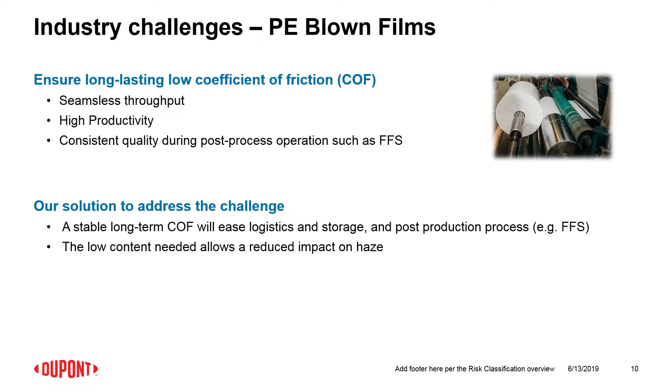Our solution makes a stable long-term COF, and that will make easier the logistics and storage of the film during the processing chain and all post-processing operations. This additive is added at a very low amount into the skin layer, and does not impact, or very slightly impacts, the haze for a clear film. This additive, AMB12235, as I said just before, is added only in the skin layer at a very low dosage. It doesn't migrate through the film. It doesn't transfer from the siliconized layer to the opposite layer, for example, when the film is rolled after the extrusion process. And this additive can be used with very standard dosing equipment.

This additive is a combination of slip agent and anti-block, and we know that the right combination of these two components is very efficient to manage low and consistent COF. It's easy to supply and handle. This master batch is a free-flowing pellet. It is used with conventional dosing equipment, and something very important, it doesn't change the extrusion process parameters of the film when it is extruded. The typical recommended level is between 4 and 6%.

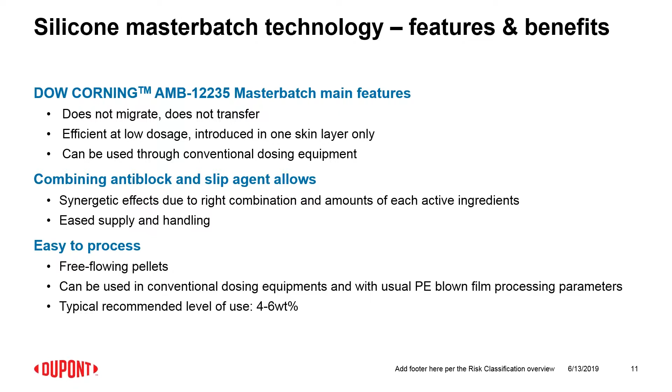So, experiment setup: I will present the film structure where our additive was studied compared to traditional organic solution. We will focus on COF, mechanical property, and transfer. So we have defined a multi-layer PE film structure in order to evaluate the efficiency of our additive. This PE blown film was produced on an industrial line.

It was a 3-layer film: one skin layer, 15 microns thickness, made with a plastomer, very low density polyethylene, where polymer processing aid and anti-block were added with slip agent, organic slip additive. A core layer that could be a multiple core layer, but in our case this core layer was made only with LDPE, and the opposite layer, thickness in between 15 to 20 microns, which is a combination of LLDPE and LDPE plus polymer processing aid plus silica as anti-block.

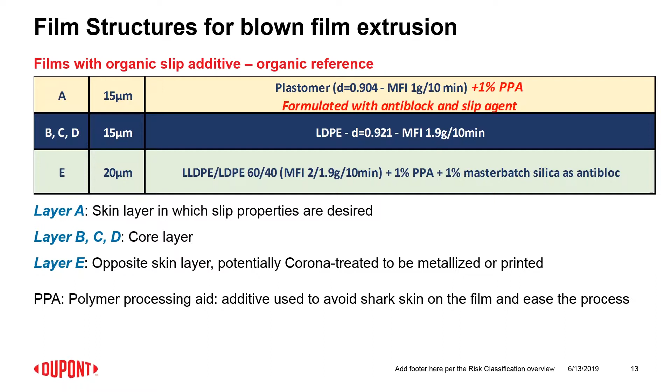This layer E could be corona treated to make the film metallizable or printable. Same structure of the film where our silicone additive was tested. So our additive was added into the layer A. So it is the low sealing initiation temperature skin layer made in plastomer. Plastomer is a very low density polyethylene, density 0.902.

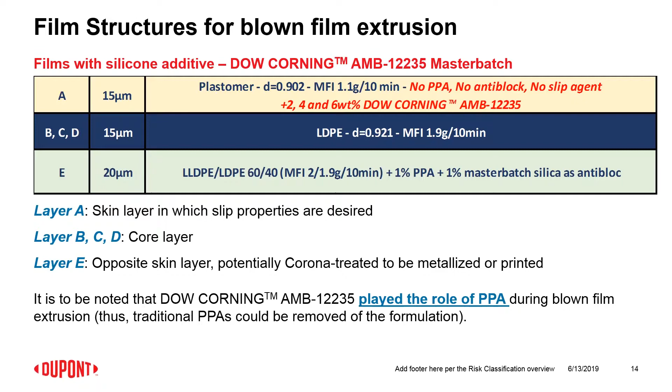Our additive was added in between 2 and 6% into this layer. No processing aid was added and no anti-block, because our additive is a combination of slip agent and anti-block. The core layer was exactly the same, LDPE, and the opposite layer, same composition, same thickness. Because our additive is based on silicone, our additive works as a processing aid, and polymer processing aid could be removed from the formulation of the low SIT skin layer in plastomer.

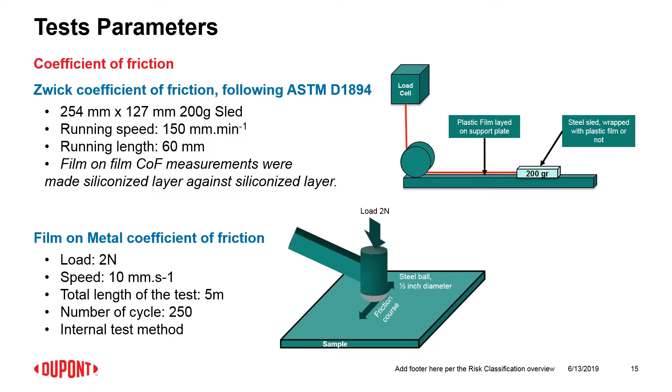This slide presents how we determine coefficient of friction on the low SIT skin layer made in plastomer where slip agent was added, comparison between organic solution and our silicone additive. So film measurement with a Zwick machine following this norm, and the film-metal coefficient of friction. We worked with a lab device which is called the Tribotester. It is an internal method. We apply a load on a ball, and we apply a certain number of cycles and determine dynamic and static coefficient of friction steel-film.

Of course, we have evaluated the effect of the addition of our additive into the skin layer on mechanical property of the film. So we have determined tensile properties, cross direction and flow direction, and tear resistance following these two mentioned norms.

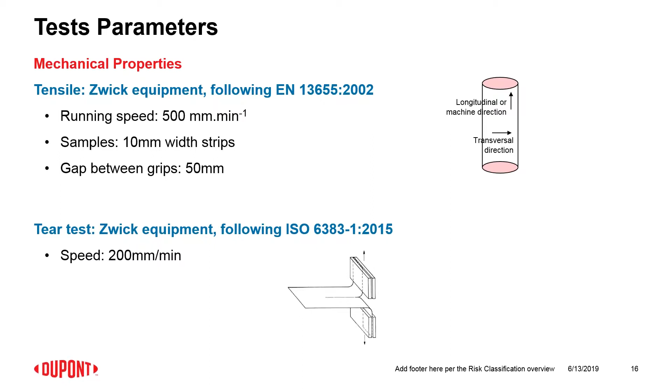So results, that's the most important part of the discussion. This curve presents dynamic and static coefficient of friction film-film. So our additive is added during extrusion process into the low SIT skin layer of the film, and we follow coefficient of friction as a function of the concentration of the additive. Purple curve dynamic COF, green curve static COF. Of course, higher is the amount of our additive, lower is the coefficient of friction.

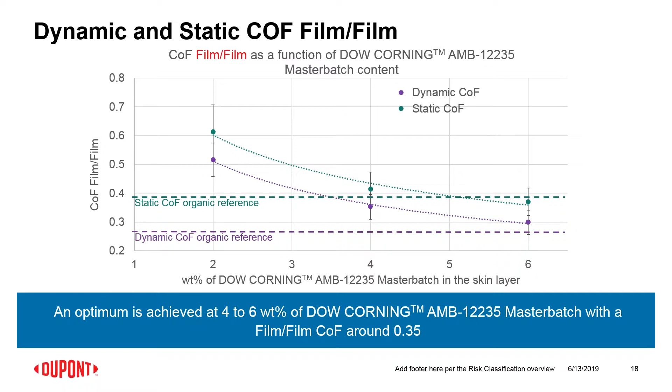We compare the efficiency of our additive to static and dynamic COF coming from organic reference, and we clearly see that we can reach exactly the same behavior in terms of coefficient of friction film-film when the amount of our additive is in between 4 to 6% into the low SIT skin layer. And we can say we reach film-film COF around 0.3, 0.35 when 4 to 6% of our additive is added into the low SIT skin layer.

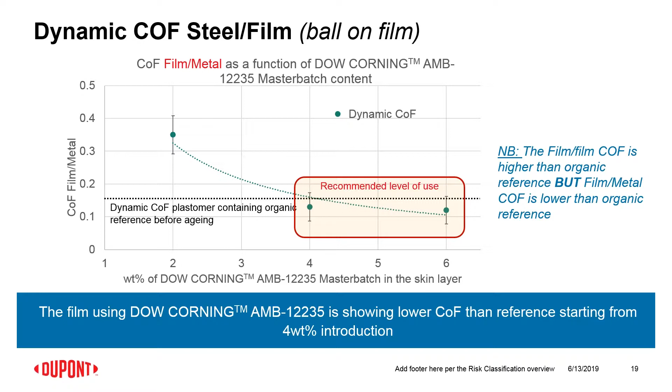But what is very interesting is to observe the evolution of the efficiency in terms of COF of our additive after aging. So we apply an aging on the film, 2 months at 45 degrees, and we observe that dynamic coefficient of friction is really consistent, no change. So there is no effect of aging on the efficiency of our additive in terms of coefficient of friction, steel-film COF.

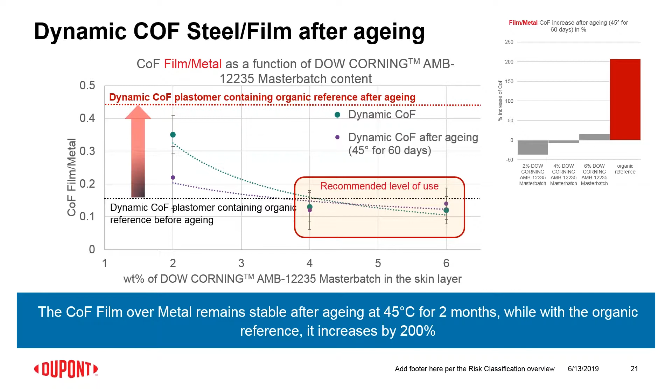Of course, if we compare after aging the efficiency of our silicone additive to the standard organic reference, we see a very big difference. We know that organic additives are not stable after aging. That is one of the main advantages of our additive. It remains stable COF over time and temperature.

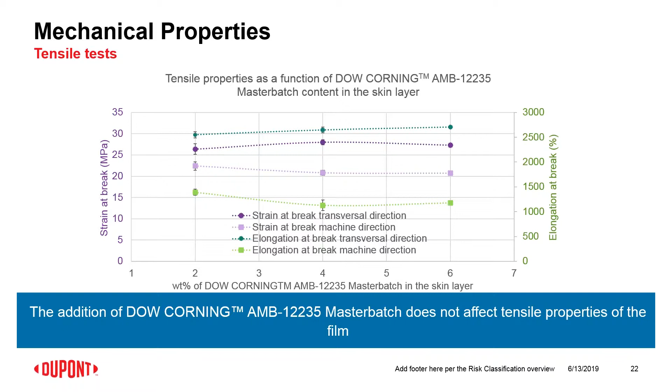In terms of mechanical properties, this graph presents strain at break and elongation at break of the film as a function of the concentration of our additive into the skin layer. So everything is flat, no effect, no negative effect by the addition of our additive into the skin layer on film property.

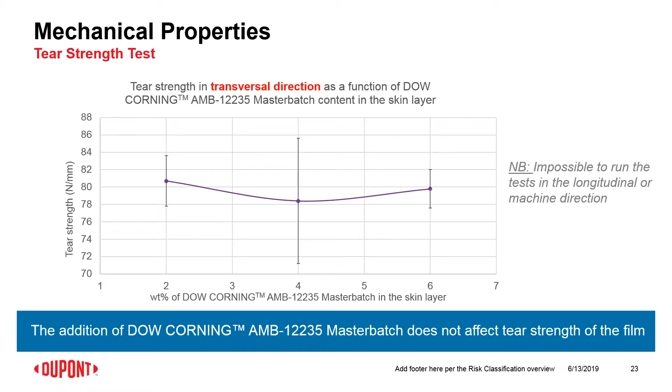Exactly the same observation for tear strength. The addition of our additive into the skin layer doesn't negatively impact the tear strength of the film. So the film is not affected, mechanical property of the film is not affected by the addition of our additive. A very important point is the transfer.

When the slip additive is added into the low SIT skin layer, after extrusion, the film is rolled. And of course, the layer which is treated with the slip additive, and in our case, it's a silicone additive, is in contact with the opposite layer, which is in general corona treated to make the film printable or metallizable.

And when the film is rolled, these two layers are in contact, and of course, we do not expect any transfer of slip additive, in our case silicone, from the siliconized layer to the opposite layer in order to keep consistent the surface tension of the opposite layer, which is corona treated.

We have defined and built an internal method at Multibase. In fact, we put in contact two films, siliconized layer against non-siliconized layer, and we press the two films during 2 months at room temperature. And after aging, we determine by infrared analysis the presence or not of silicone on the opposite layer, which is a non-siliconized layer.

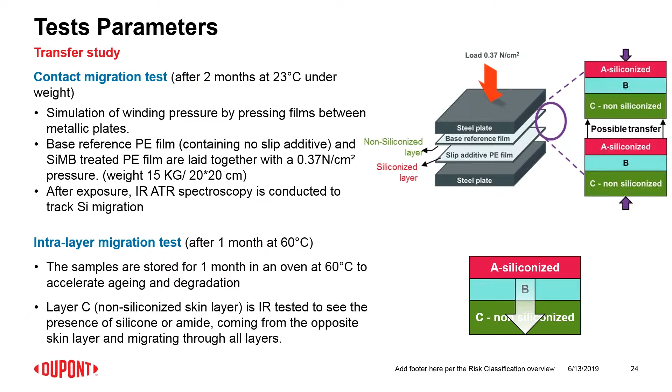And at the same time, we evaluate if there is silicone transfer through the film, so intralayer migration of silicone from the siliconized layer to the opposite layer. So we use exactly the same lab device, but the conditions are quite different. We press the film only 1 month, but at 60 degrees in order to increase the potential kinetic of migration of silicone through the film. So by infrared analysis, we determine the presence of silicone or not.

Same observation for intralayer transfer. So black spectrum, infrared analysis of the non-siliconized layer; red spectrum, infrared analysis of siliconized layer. I don't know if it is the right color, but pink is the same layer, siliconized layer, but after 1 month, 60 degrees. The intensity of the peaks are smaller. That comes from reorganization and some change in terms of crystallization of silicone.

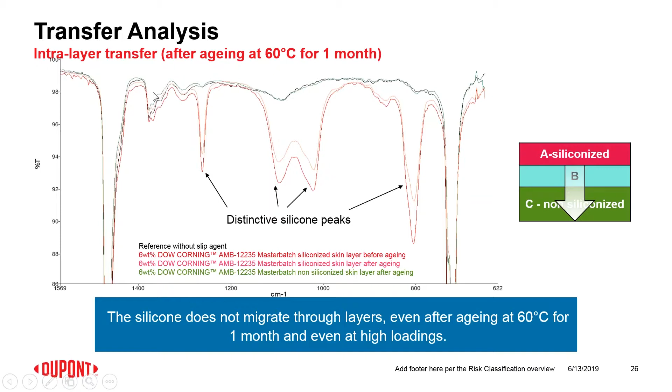In very simple words, I will explain how silicone works compared to traditional organic additives, and why it doesn't migrate and doesn't transfer. Slip additive is added into the sealing layer during film extrusion as silicone. Organic additives are small molecules, highly mobile in the matrix. The matrix works as a tank in order to maintain the property during time.

These small molecules migrate, transfer, come to the surface of the film and give the low COF of the film, but they exude from the surface of the film over time. That's the reason why there is a consumption of this low molecular weight slip additive, and because it exudes, that can create a contamination, and these molecules are not stable at high temperature.

Silicone is added during extrusion process into the skin layer, the sealing layer, only on the sealing layer. And during the melt phase, silicone migrates to the surface due to the low surface energy. And because of the ultra-high molecular weight of the silicone and the interaction with its matrix, silicone is strongly anchored on the surface of the film.

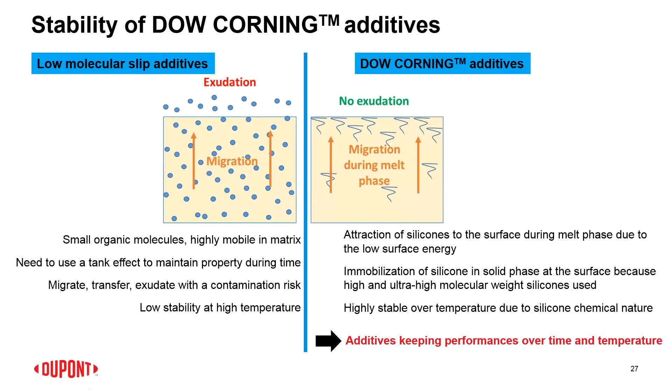That is the reason why it doesn't exude, and that is the reason why it is very stable over time. Due to the chemical structure of silicone, it is really stable over temperature, and that makes this additive keep performance over time and temperature. So in conclusion, our additive, when added into the sealing layer, because it works like a processing aid, polymer processing aid can be removed from the formulation of the skin layer.

In terms of film coefficient of friction, an optimum is reached when 4 to 6% of our additive is added into the skin layer, and we reach film COF around 0.3, 0.35. Film-metal COF is really low compared to organic solutions, and it is stable over time and temperature.

Just a comment: with silicone additive, we generally observe a higher film COF, but that doesn't mean that film-metal COF is high. That's the reason why we recommend to our customers to measure film-metal coefficient of friction when this is a desired outcome for the use of this slip agent.

We have seen that addition of this additive does not negatively impact mechanical properties of the film. I just explained that the silicone does not transfer against the non-siliconized layer by contact. It does not migrate through the layer with temperature, and this way it doesn't affect printing and metallization of the film. The recommended level of use for this new silicone additive is between 4 to 6%, and it is added only in the desired layer, which is the sealing layer.

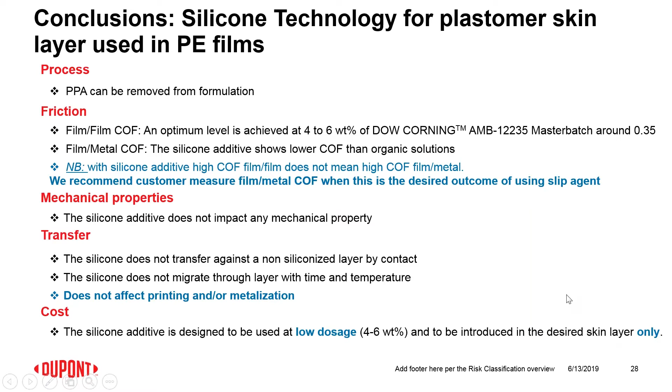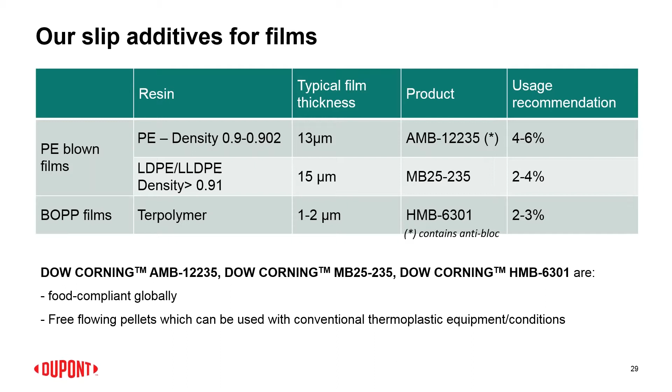So what is the difference between MB25235 and AMB? In fact, AMB is a combination of silicone polymer, and it contains anti-blocks. MB25235 is only a silicone masterbatch. It doesn't contain anti-block. In terms of silicone, there is some difference. In fact, the interaction between the matrix and the silicone is different, and that makes the difference in terms of efficiency. Yes.

Another question: is the COF affected at high temperature? Coefficient of friction of film, while the skin layer is a low SIT skin layer, is not affected by temperature. This COF is consistent over time and temperature. We have tested this new additive on a film at 45 degrees, and we keep stable the coefficient of friction.